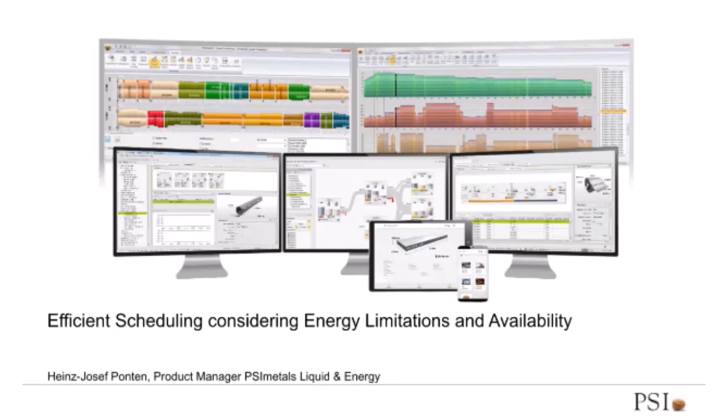And here I'm repeating what was said already. So before going to the details, I want to start with the facts, and it's not surprising, well known for everybody here around. And depending on which statistics you read, you will find different figures, whether it's 7 or 8% of the world's industrial greenhouse gas pollution. But at least it is recognized as a key and hard to abate industry. And the world is looking for rapid, but also for innovative transformation.

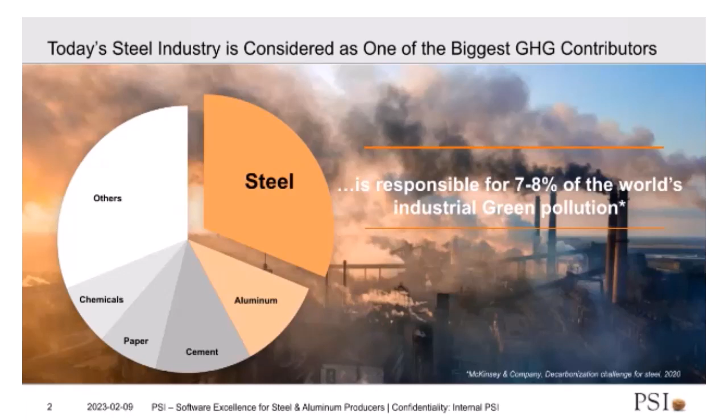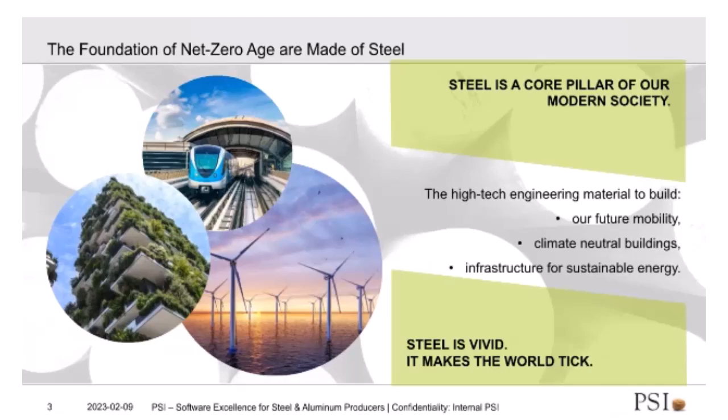And there's also no doubt, and I guess everyone shares my view here, we all need steel. Steel is a core pillar of our modern society. It is the high-tech engineering material to build our future mobility, climate neutral buildings. And it's absolutely necessary for building the infrastructure for sustainable energy. So steel is vivid, it makes the world tick.

These are the facts, but as we heard already, we have a lot of challenges ahead of us. The carbon neutral steel production shall be achieved latest by 2050. And our customers have set up huge transformation programs to achieve major reductions already by 2030 or by 2040. And despite this evident process, it's a long and challenging way. The end customers are asking already more and more for CO2 reduced products.

The new processes using hydrogen, green hydrogen, DRI, with smelters, will replace the classical blast furnace and BOF routes. Other steelmakers are changing completely to the electric arc furnace route, or, as we heard, are going to combine all these new technologies. Therefore, there's a massive demand for hydrogen and electrical energy to power all these new processes.

However, the transformation process will need time. New green hydrogen and DRI-based technologies and steelmaking routes will operate in parallel to the classical routes. It's not a big bang. It is a stepwise replacement, and the hybrid steel plants, we call that the hybrid steel plants, will be the solution for the coming decades.

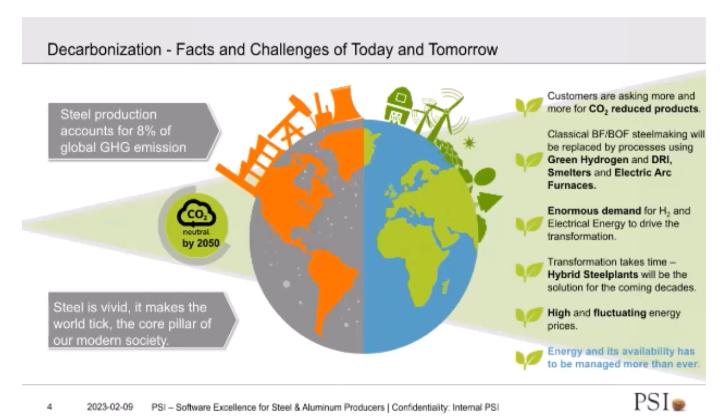And in my presentation, I want to discuss how PSImetals can support, on the one hand, the digitalization, but also the transformation to green steel making. And that's the core topic of this presentation. How do we efficiently schedule and consider energy limitations and the availability of energy? I want to share with you the PSImetals view on how steel plant digitalization can become future ready to cope with all these challenges ahead of us.

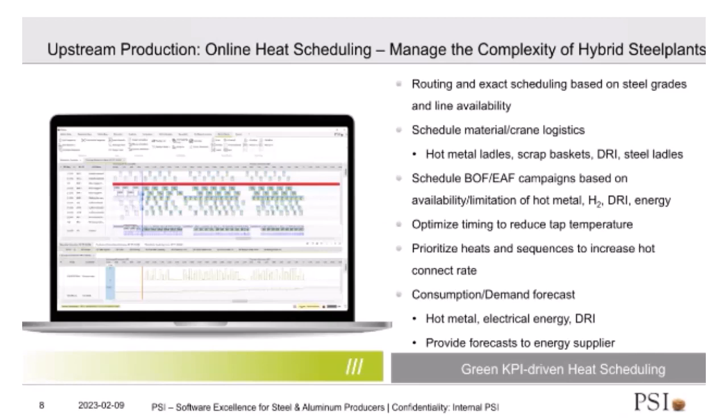This leads me to the next slide, where we can have a closer look. Again, we see the Gantt chart with what we call the hybrid steel plants. We have 3 BOFs here and 1 EAF, and the red line indicates that, for example, BOF number 1 is currently not in operation because we have an EAF in operation in order to replace 1 BOF.

And in the lower part of the chart, we see 2 forecasts. We have what we call the hot metal stock evolution, the hot metal which is needed in the BOF processes, but we also have a forecast for the electrical energy demand of the electric arc furnace and the ladle furnaces. The energy demand forecast is based on scrap menus for the electric arc furnace, and for the ladle furnace based on temperature increases.

These forecasts can be handed over to energy management systems or even to the energy provider to automatically align the demand and what needs to be provided. This is very important information for the energy supplier in the future, as these steel plants will be mega consumers of electrical energy.

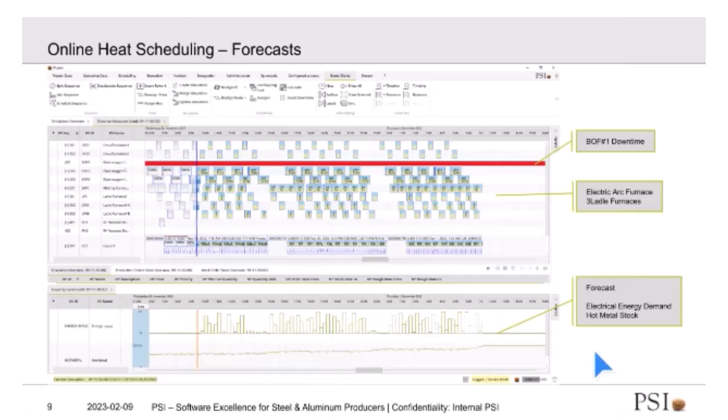And for the complex hybrid steel plants, we are able to adapt the same concepts also to forecast hydrogen or DRI demand. And finding the right answer on how to run such a plant in the most efficient way becomes a more and more complex task for the schedulers and the users.

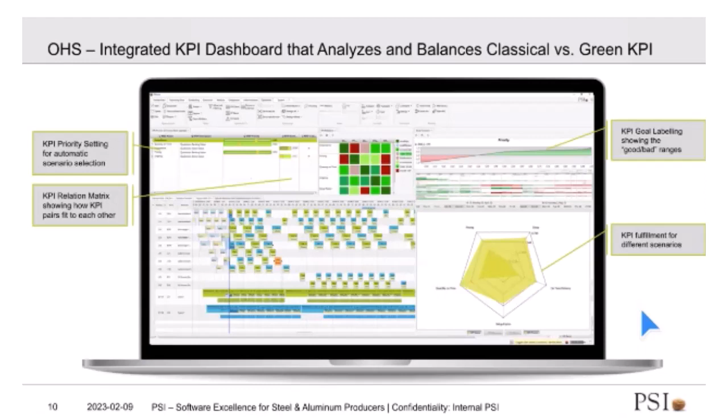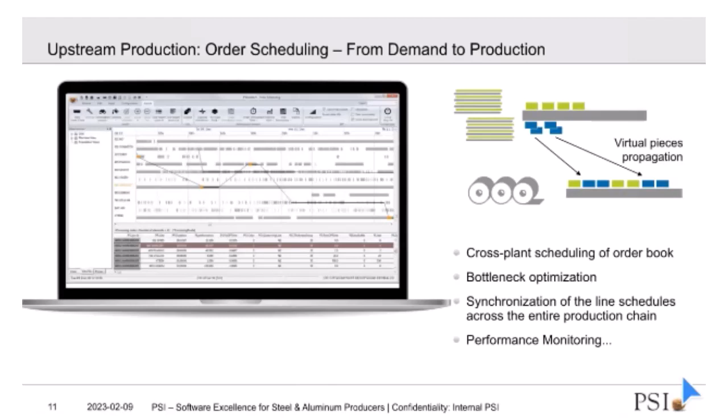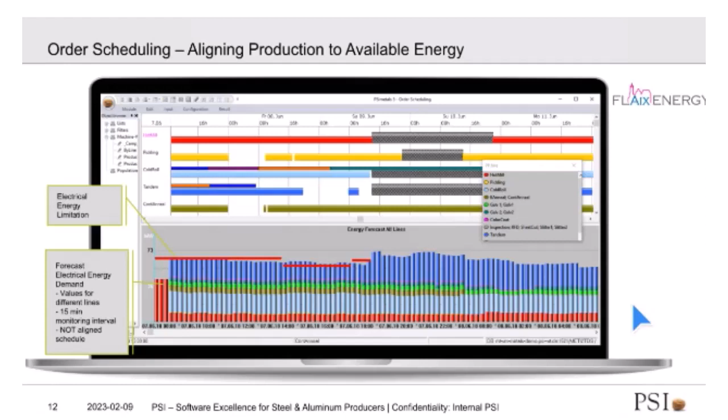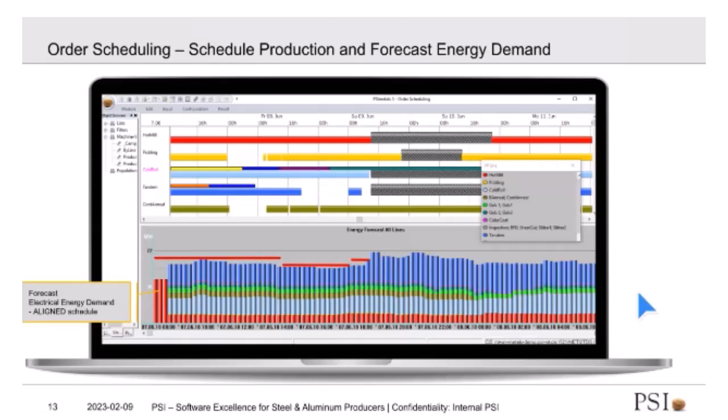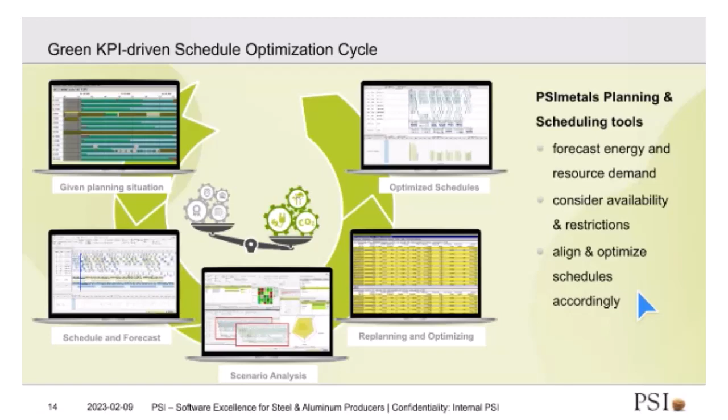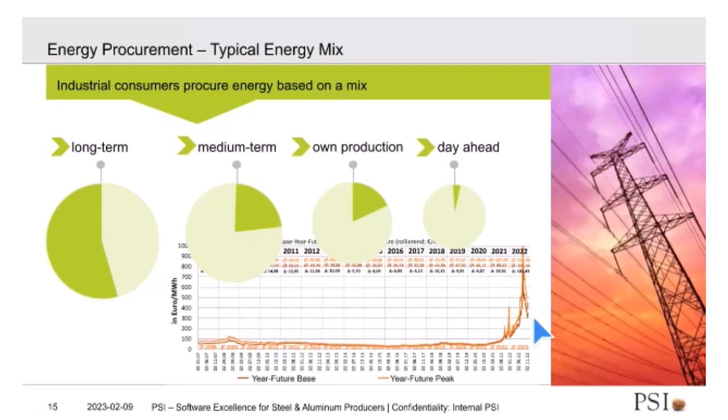Availability and volatility of wind and solar power will be another aspect to be considered in the green transformation. And we certainly believe that this will lead to a different strategy to purchase and manage energy. The logical consequence is that we need to bring production planning and scheduling with energy procurement closer together.

And I don't mean that we only need to bring the production people and the energy managers together at a round table. I assume that's hopefully already happening today. I say we need to link their processes closer. And by linking, I mean to digitalize the entire process of planning and purchasing for different horizons and to put them together in one system.

It leads me to what I call the PSI Metals vision: scheduling combined with energy trading powered by Qualicision AI. With this vision, we are bringing the expertise and functionalities of 3 PSI companies together. We have PSI Metals with planning and scheduling functionality. We have PSI Energy Markets with energy trading. And we have the PSI Fuzzy Logic company bringing the smart decision solvers into our products.

PSI has now developed a so-called smart day trader algorithm based on Qualicision AI, and we call that the PSI Algo Trader. The Algo Trader uses the demand forecasts and automatically fills the gaps for certain periods by buying energy quotas on the spot market. This brings real-time production and energy management together to cover the short-term demand on top of the given energy quota, to react very fast to changes and energy needs in the production.

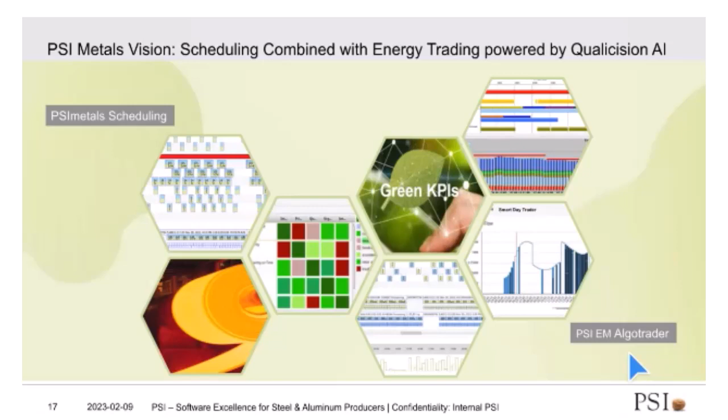And I want to close my presentation now, and I hope I was able to give you an impression of how PSI Metals supports the digitalization and transformation of green production management. With PSI Metals, we are creating a holistic 360-degree view on green production management. Classical planning and scheduling services, where cost effectiveness often already implies sustainability, have now been enhanced by energy demand forecast and smart optimization algorithms, which are driven by green KPIs.

With this, we want to set a new impulse, coping with the challenges of complex hybrid steel plants and efficiently managing the production, but also energy demands and energy availability. For the transformation journey of our customers towards sustainable and green steel making, and to continuously reduce the CO2 emission, PSI has the right tools to balance and to trade off between economical and ecological production management.